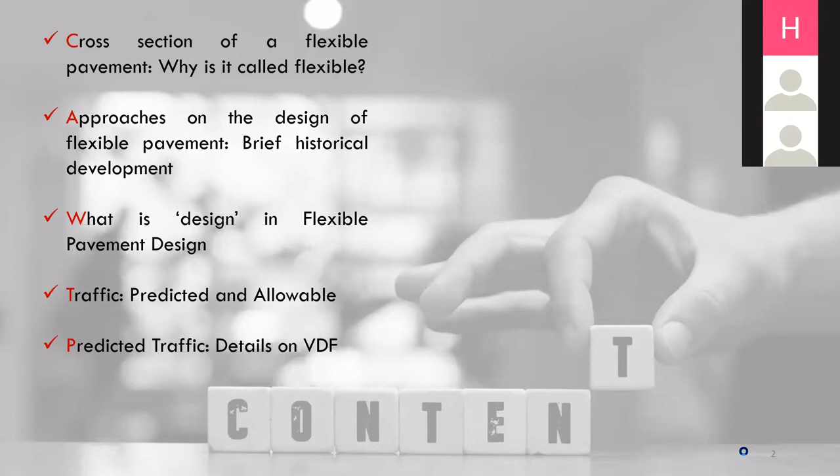Traffic will be introduced in two forms: predicted traffic and allowable traffic. We will discuss in detail about the estimation or calculations of predicted and allowable traffic, and we will try to understand the importance of various parameters associated with them. This part of the presentation is the most important according to me.

Then we will summarize what are the steps involved in the designing of flexible pavement. And finally, we will look into the future challenges ahead and the key takeaways from this discussion today. So, with this menu in the presentation, let us start.

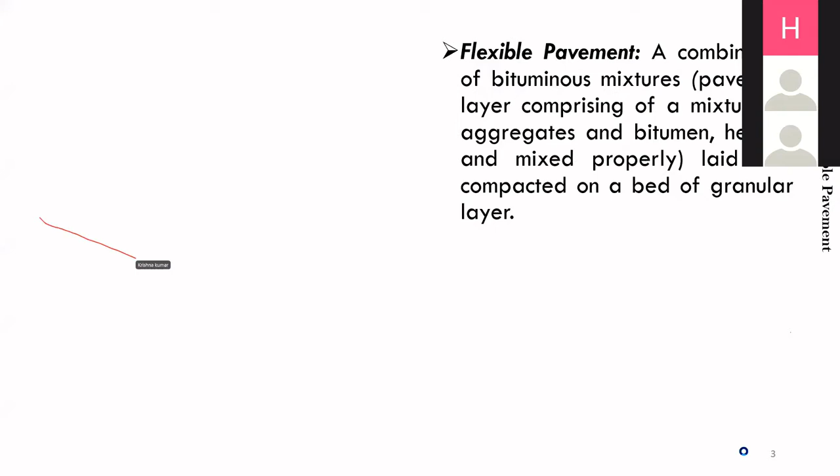Let us first start with the definition of flexible pavement and an understanding of its structure. In a simple way, we can define a flexible pavement as a combination of bituminous mixtures, which is laid and compacted over a granular bed. The bituminous mixture is a combination of aggregates and bitumen, which are heated, mixed, and compacted appropriately.

I chose this definition to put some stress, or priority, on the bituminous layer in the flexible pavement, which is the most important and costliest component in the flexible pavement crust. There is something very interesting here: in a bituminous layer, we have approximately 85 to 90% aggregates and only 10 to 12% bitumen by volume. But 70% of the cost of a bituminous layer comes from bitumen and only 30% from aggregates. This shows how important the small amount of bitumen is in the flexible pavement.

Ankit, there is something projecting on the screen. I don't know, it's happening with me. Ankit, are you able to hear me? Maybe I'll minimize it. Actually, I had force-unmuted all the audience, so it took time. Yes, I think there is some projection issue. I may allow the host, and I would request the host to please take control over it if you can. Okay, so let us proceed then.

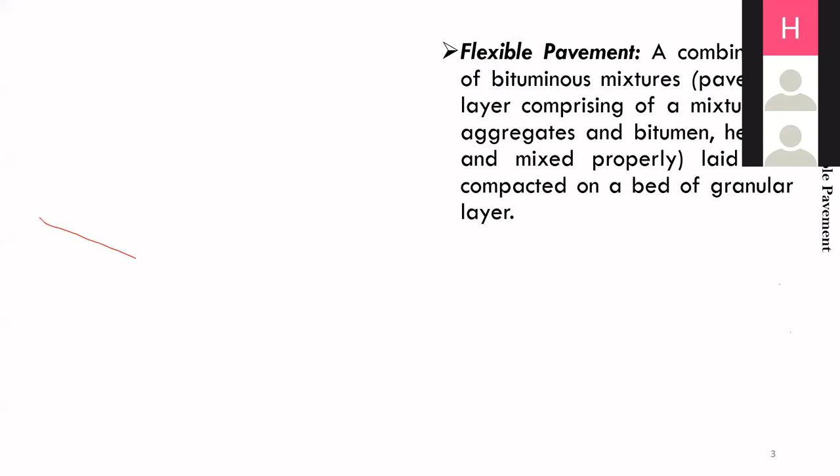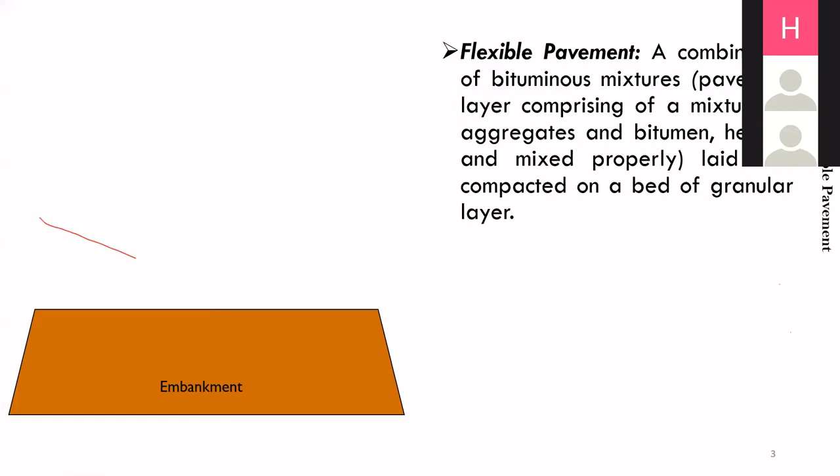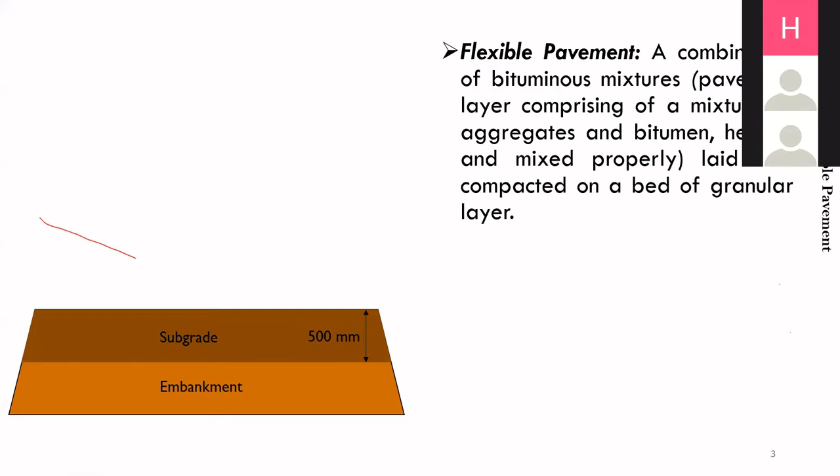Okay, so the bottom part is the embankment, commonly. We can also have a pavement in cutting, but I am just showing embankment here, which is more common in nature. Subgrade can be considered as a part of the embankment or the natural soil in the top 500 mm. Now, the subgrade is also sometimes made up of select borrow soil to meet the density and strength requirement, which is higher than that of the embankment.

Next comes the subbase, and conventionally we use a granular subbase, which is laid and compacted in single or multiple layers. For example, we can have a filter layer and a drainage layer within the same subbase. We can also have a stabilized subbase depending on the requirement. Now, granular subbase, as you can see, is extended to the full width of the embankment.

Above the subbase rests the base layer, and conventionally a granular base is used. We also have options for other base layers such as cement treated bases and emulsion or foamed bitumen treated bases. This is followed by a prime coat, which is a spray application.

Typically a medium curing cutback is used, and it is expected that the prime coat will fill the surface voids in the base layer. After priming, we apply another spray application, called the tack coat. Tack coats are usually emulsions and are applied to ensure proper bonding between two bound layers. The next bound layer which comes over it is bituminous and is denoted as the binder course.

Above this, we apply tack coat again. The next bound layer is also bituminous and is termed the surface or wearing course. This is the top layer of the pavement which you are seeing now. Sometimes an intermediate layer is also put between the binder and the surface course, so the bituminous layer itself can be laid in 2 to 3 different layers.

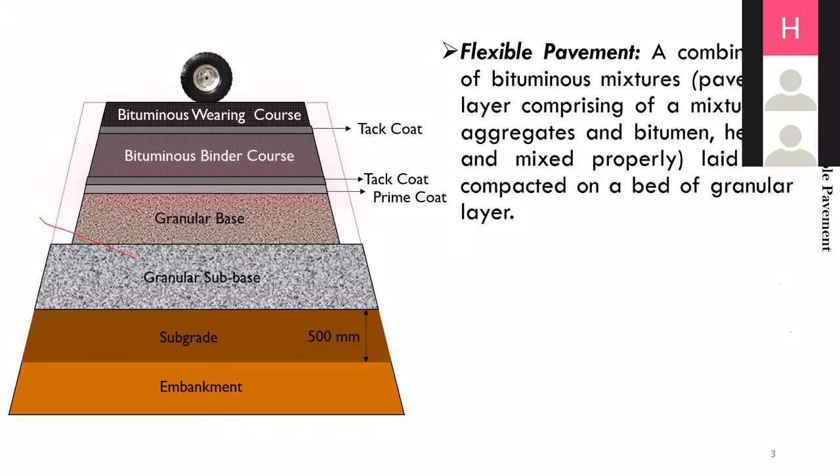The vehicles move on the surface of the layer and cause deformations. The shoulders, which run from the base layer to the surface layer, can be made of earth or can be hard, or paved, in nature. Now, flexible pavements do not have much flexural strength, so the load coming on the surface is transmitted through grain to grain contact. Therefore, the different layers are involved in resisting the deformation within this structure, and any deflection which happens at the bottom, you can see the same deflection at the top. So this is the basic overview of the flexible pavement.

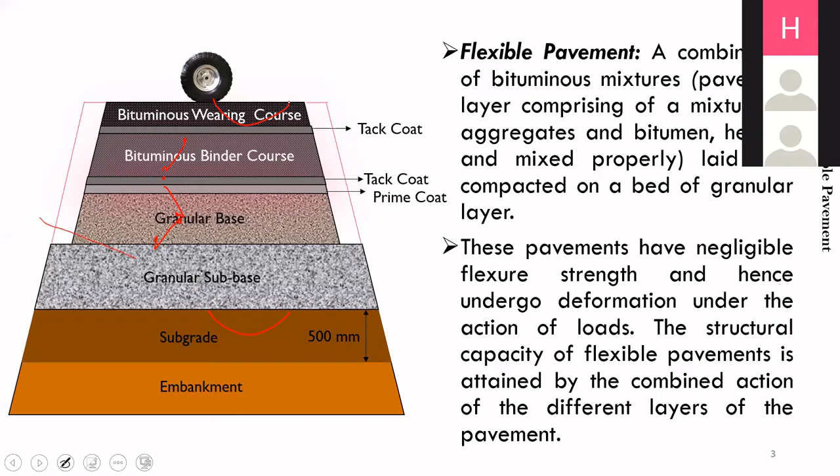Now, before we define what design is in flexible pavement, let us quickly look into how pavement construction and design processes started and got developed.

Prior to the 1920s, the thickness of the pavement was purely based on experience. The same thickness was adopted for all locations, irrespective of varying soil conditions in those locations. As per available records, the first asphalt roadway was constructed in Newark, New Jersey, US, in 1870. Another record mentions the construction of a sheet asphalt in 1876.

Now, this was constructed in Pennsylvania Avenue in Washington, D.C. Sheet asphalt, which I am just marking now, is a mixture of clean angular sand and bitumen. Here we have to note that the bitumen used during this period was natural bitumen, not manufactured bitumen. Manufacturing started only after the 1900s.

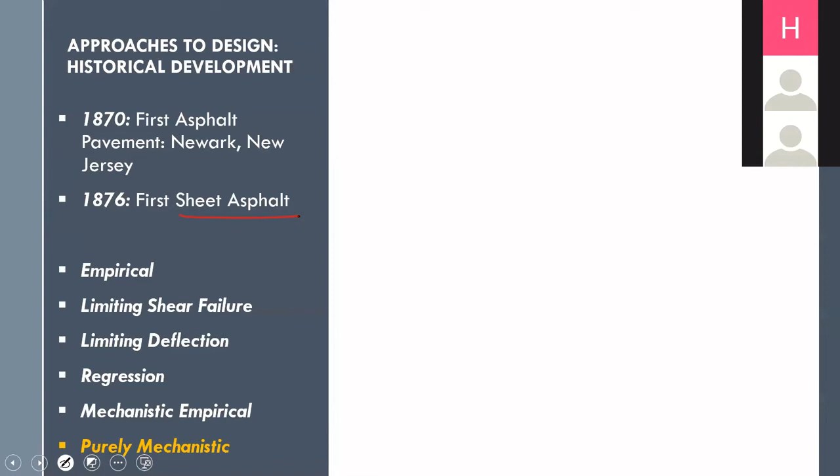Since then, many design methods have evolved. Different design methods for determining the thickness of the pavement can be divided into 6 broad categories: empirical method, limiting shear failure method, limiting deflection method, regression equations based method, mechanistic empirical method, and purely mechanistic method. In the empirical method, there are 2 subcategories: empirical method without any test on soil, and empirical method with a test on soil.

An example of the first subcategory is the design of pavement using the public roads classification system, which came around 1929. In that system, the soil was classified as A1 to A8 under uniform category, and B1 to B3 under non-uniform category. This was later modified through the Highway Research Board classification system in 1945, in which the soil was classified as A1 to A7, and the pavement thicknesses were determined based on the soil type.

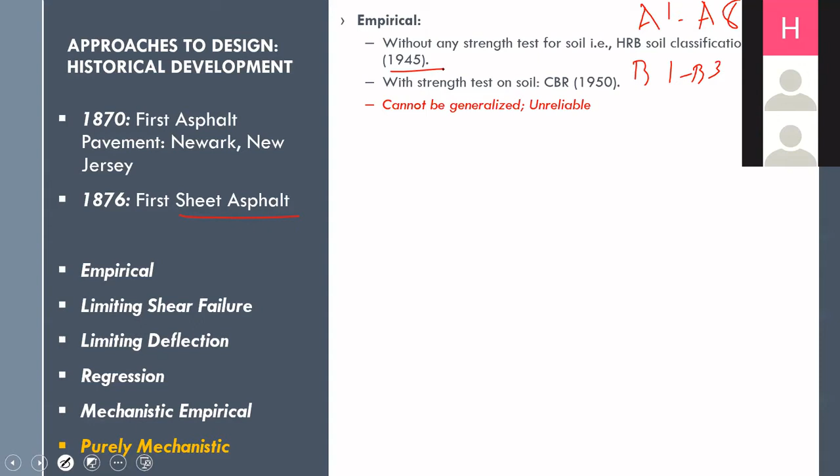The other subcategory under the empirical method is the one that uses the CBR test for soil. Pavement thickness is determined based on the CBR value of the soil. The pavement design in India also used this method initially, and then later we revised our specifications. The empirical method is highly dependent on the conditions, especially the loading condition, the environmental condition, and the material properties for which the method was originally developed. So they cannot be generalized for all locations and they can give unreliable results.

In the limiting shear failure method, developed around the 1950s, the pavement thickness was based on the bearing capacity of the soil, in which the angle of internal friction (phi) and the cohesion of material (C) were used to determine the required thickness or strength. This method, though fundamental in nature, could not last for long, as it was found that the pavement should be designed for riding comfort and not merely for preventing shear failures.

During the same period, around 1945 to 1955, the limiting deflection method was also developed. Pavement thicknesses were determined to control excessive deflection in the surface of the pavement. A few design methods under the same category also considered subgrade deflection instead of surface deflection. But it is found that generally pavement fails by excessive stresses and strains, and not only by deflection. So this is one demerit of this method.

During the 1940s to around 1960s, the Highway Research Board conducted extensive field scale studies to understand the effect of various parameters on pavement design. One of the very famous road tests is the AASHO road test, which laid the foundation for AASHTO pavement design. In these field scale test methods, regression equations were developed based on field data, which were further used for pavement design. One major disadvantage is that the regression equations are location dependent and cannot be reliably applied if these conditions are changed.

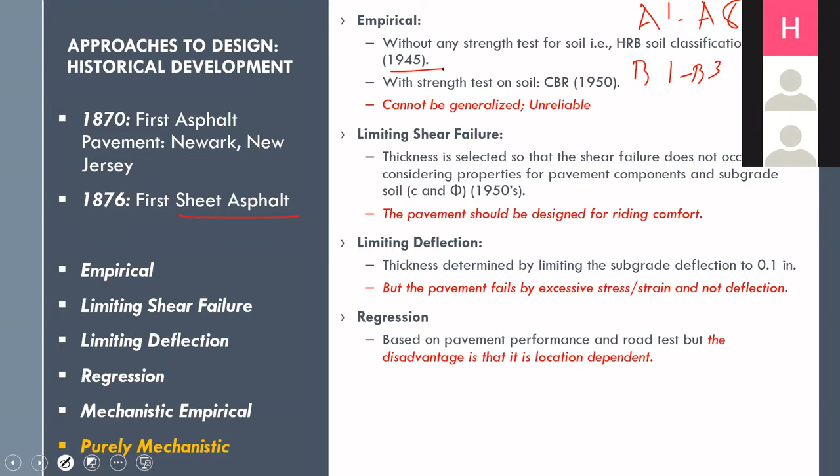The current method, which most countries including India are adopting, is the mechanistic empirical method. In this method, the response of the pavement structure in terms of stresses and strains is obtained using some mechanistic process, for example using linear elastic theory. These response values are used to predict the life of the pavement from field observations. The commonly used responses correlated with pavement performance are the horizontal tensile strain at the bottom of the bituminous layer and the vertical compressive strain at the top of the subgrade. We will discuss them in further slides.

The last method, marked in yellow here, is the purely mechanistic method. This is a future dream to achieve, where we can design the pavement without the necessity of any field observations. But this, however, is very challenging in nature, considering that the materials we use in the pavement are not linearly elastic in nature. They have a lot of variation, and there are a lot of variables which control their performance and so on.

Now let us understand the steps of pavement design. What is pavement design? Pavement design is nothing but finding the suitable layer thicknesses with some specified or assumed material properties, such that the pavement can take the anticipated traffic up to a certain design period before failure. The keywords in this definition are made bold and underlined. Now let us understand them to understand the design process. The anticipated traffic and the design period fall under the same umbrella.

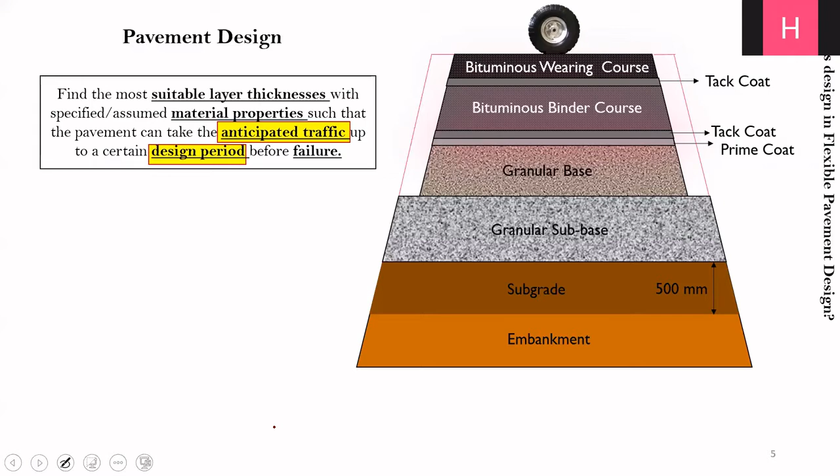Traffic in pavement design means only the commercial vehicles, that is trucks or buses, which are more likely to cause damage to the pavement. So we need to predict the traffic for a given period.

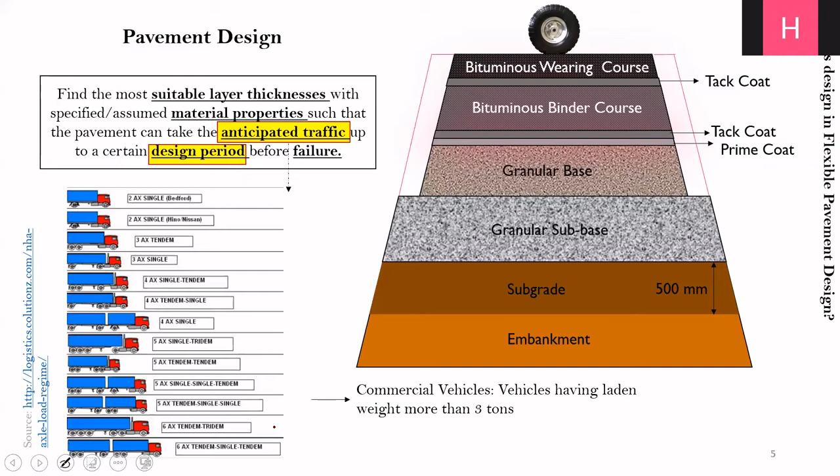The pavement should be designed such that the predicted traffic is less than the allowable traffic. Predicted traffic is determined after doing a traffic survey. We can do manual survey or we can use videography. So what are we doing? We are counting the traffic today and forecasting it for future.

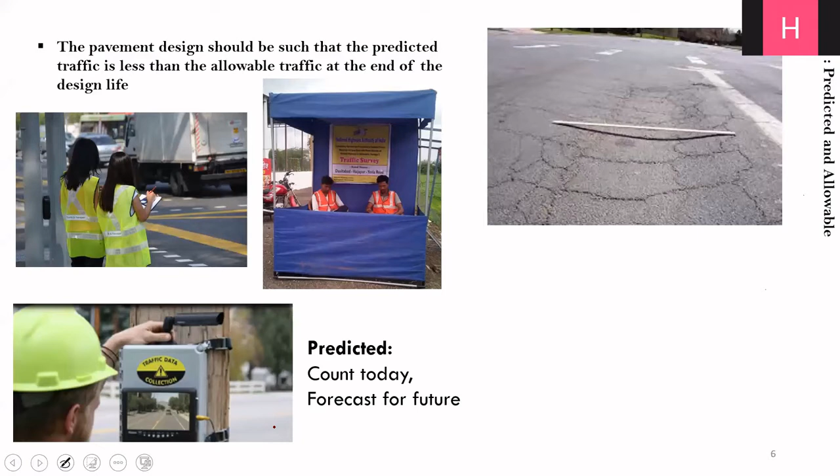What about the allowable traffic? Allowable traffic is the amount of traffic that the pavement can take before failure. And what is failure here? It depends on how we are defining failure. One can define failure as occurrence of say 20% cracks, occurrence of say 20 mm rutting, and so on.

So what are we doing? We are determining that after how many repetitions of trucks my pavement will have 20% cracking, and after how many repetitions of trucks my pavement will have 20 mm rutting, and so on. This allowable traffic is determined from performance models. In short, predicted traffic is determined from traffic survey and allowable traffic is determined from performance models.

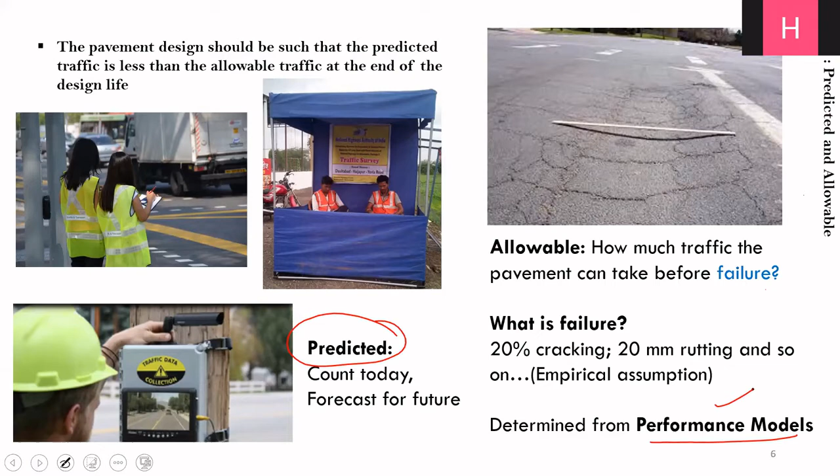So in order to find the total amount of commercial vehicle that will come on the pavement, we have to perform a traffic survey. And we will use this equation for forecasting.

What is this equation? This equation is T equal to 365 into ADT, which is the average daily traffic, into 1 plus R to the power N minus 1 by R, where R stands for the rate of increase in traffic, N is the design period, into VDF, which is the vehicle damage factor, into LDF, which is the lane distribution factor. Now, what is VDF?

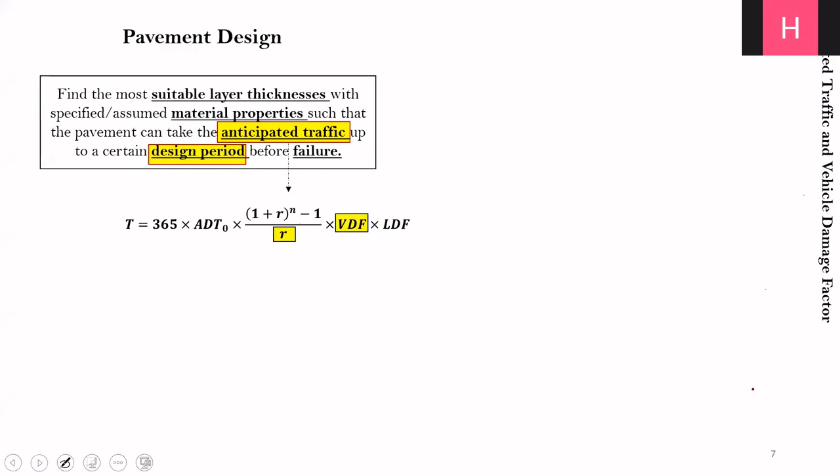As we know, in a pavement different types of trucks, for example single axle, tandem axle, and other multi-axle trucks, will be moving. Now, VDF is used to convert the movement of all these different trucks into some standard truck. We will look at how to do that.

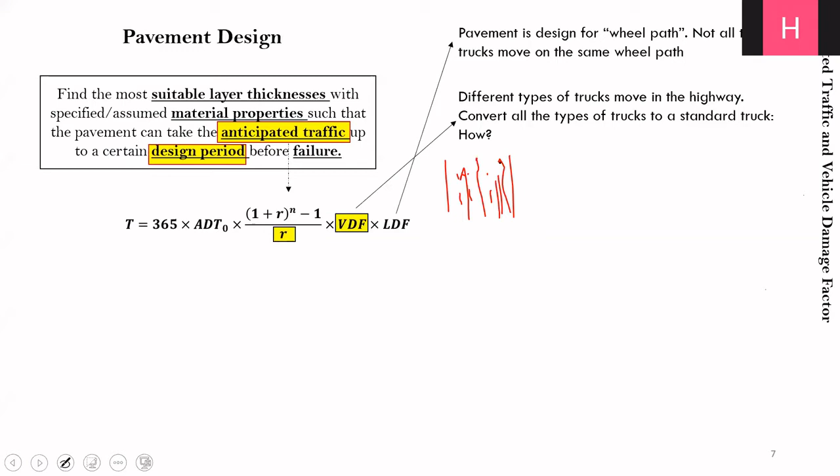Also, in pavement design we consider only the wheel path for analysis. So we can understand that not all vehicles will be traveling on the wheel path. Suppose this is the pavement, and this is the wheel path - some trucks will move here, some there. So there will be a distribution of vehicular movement across the lateral surface of the road. Depending on how wide the road is, the amount of traffic that travels on the wheel path will change, and we will consider only that proportion of traffic for design.

First, the present traffic has to be estimated using a traffic survey, so usually we do a 7-day, 24-hour count. The value of R, the rate of increase, depends on many factors. The growth rate depends on many factors and has to be precisely estimated using past trends, demand elasticity, and other factors.

One can refer to IRC 108 for more details. Also, the growth rate has to be established for each category of vehicle. For example, the growth rate of a single axle truck can be different from the growth rate of a tandem axle truck, and so on. So for each category of vehicle, we should find what is the growth rate.

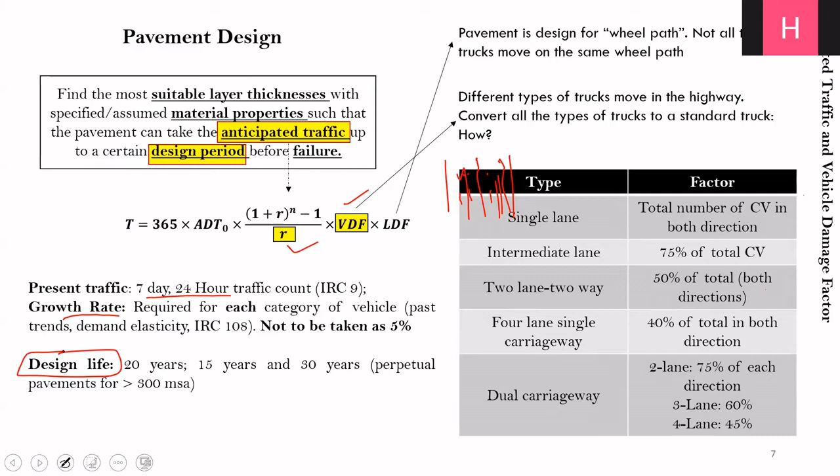The design life, that is the value of N, depends on the type of facility we are designing. For national highways and state highways, it is usually 20 years. For other roads, it can be 15 years. If the pavement is anticipated to receive very high traffic, we can design a perpetual pavement also, which we will discuss in the second half, having a lifespan of more than 30 years.

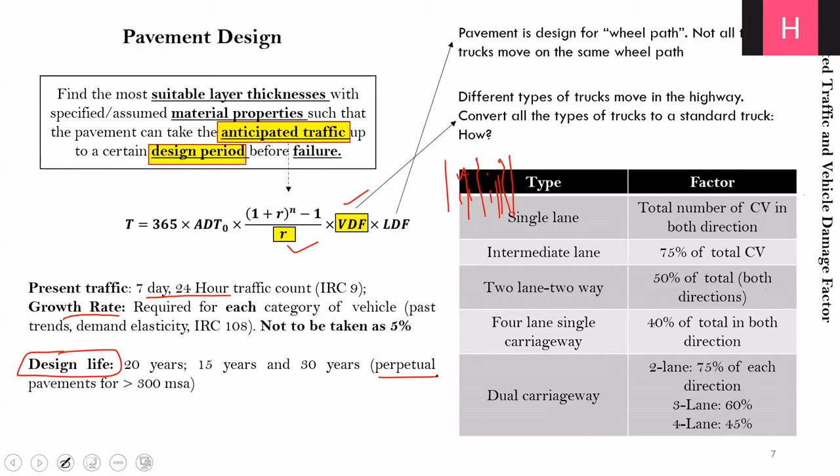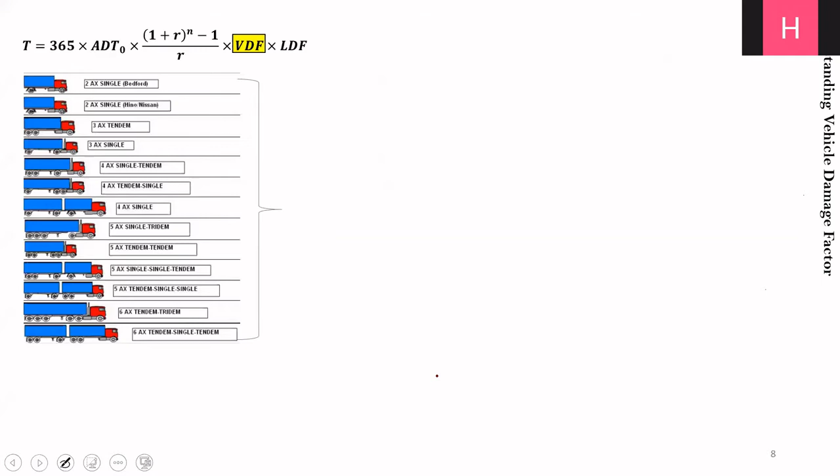Now let us talk about VDF. As I said, we will have different types of trucks with varying axle configurations moving on the pavement. Now, I want to convert the number of repetitions of different trucks to the number of repetitions of a standard vehicle, which in our case is a single axle truck with dual wheel set at the rear. The standard axle load is taken as 80 kilonewton with a tire pressure of 0.56 megapascals.

Now, what is important for us is to understand the fundamentals of VDF. Let us start by defining it first. So, what is VDF?

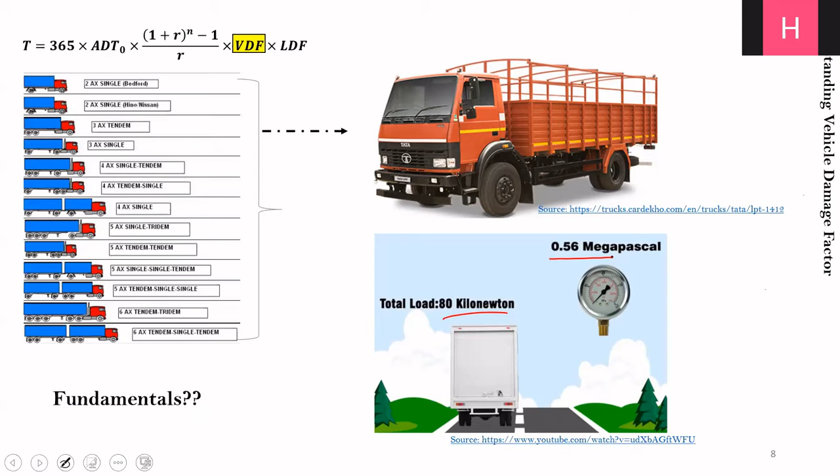VDF is the damage per pass to a pavement by the axle in question relative to the damage per pass of a standard axle load, which is usually 80 kilonewton single axle load.

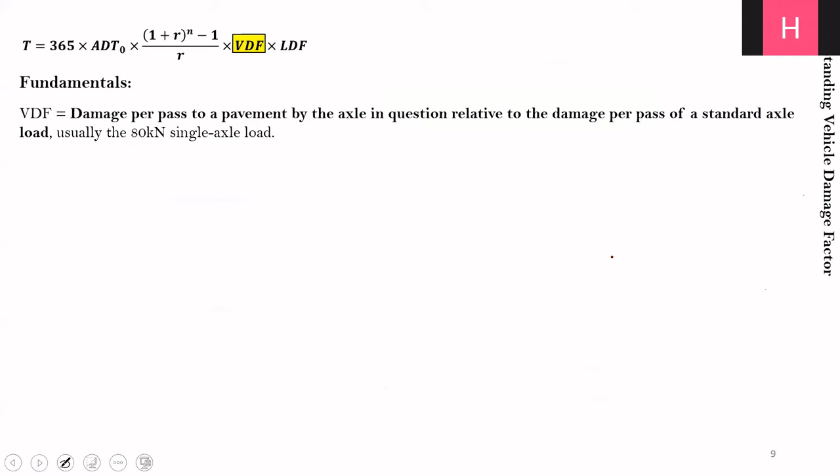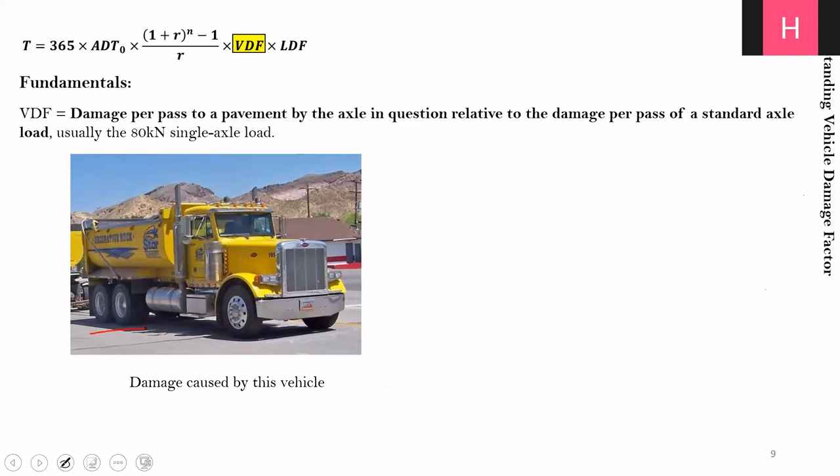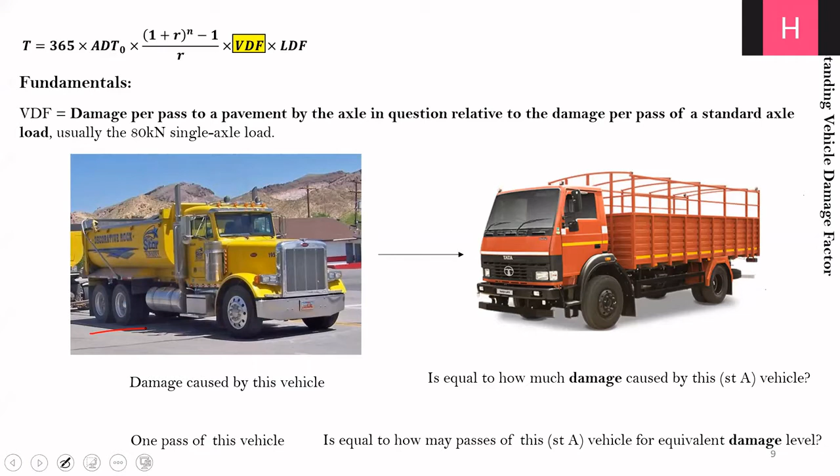What does this mean? It means the damage caused by this truck, which is a tandem axle, is equal to how much damage caused by the standard axle truck. In other words, one pass of this vehicle is equal to how many passes of the standard axle truck at the same level of damage. And how is damage defined?

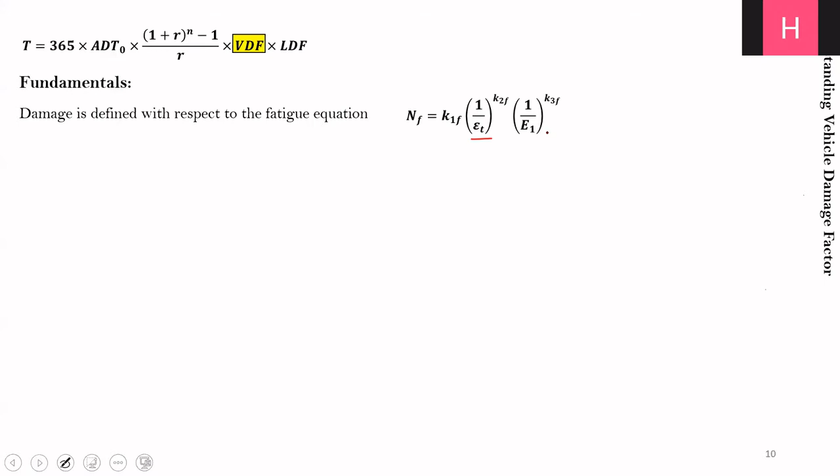Traditionally, the fatigue model is used for defining damage. This was considered in the AASHO test, from where the concept of VDF has been actually taken. What is NF? NF is the cumulative number of loading cycles in terms of ESAL to failure, and this is a function of epsilon T and E. What is epsilon T? Epsilon T is the horizontal tensile strain at the bottom of bituminous layer, and E is the resilient modulus of the bituminous layer.

Here, K1F, K2F, and K3F are regression model parameters. Later in this presentation, we will also discuss the development of this model.

Different researchers, or research organizations, based on large amounts of data, have found that the value of K2F is approximately equal to 4. What does this mean? From this equation, the fatigue life NF is inversely proportional to the 4th power of the horizontal tensile strain at the bottom of bituminous layer. That we can clearly see.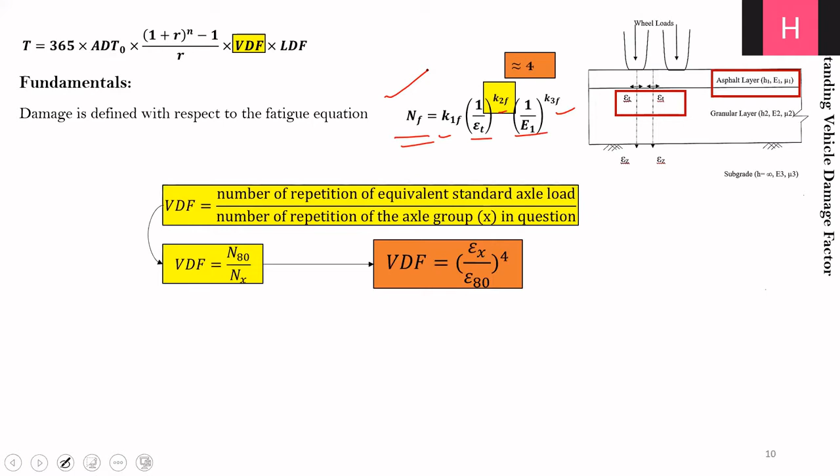Now from the model shown above, N80 is proportional to 1 by epsilon 80 to the power 4, and NX is proportional to 1 by epsilon X to the power 4. Therefore, VDF can be written as epsilon X divided by epsilon 80 to the power 4. This is the fundamental definition of VDF we should remember.

Now, if X and 80 are of the same axle configuration, that is, X is also a single axle load, say with a load of P1 — you can see this is a single axle truck with dual tires, let us say the load of this truck is P1, and this is our standard axle truck with dual wheels with a load of 80 kilonewton. If both are of the same axle configuration, we can equate strain with load.

Why? Since we know that E is equal to stress by strain, from here we can say that strain is equal to P divided by A into E. So you can see strain is proportional to P. But this will happen only when both are the same axle configuration — this is also single axle and this is also single axle. Therefore...

VDF in this case can be written as how much? P1 divided by 80, to the power 4. So this equation I just converted to this equation.

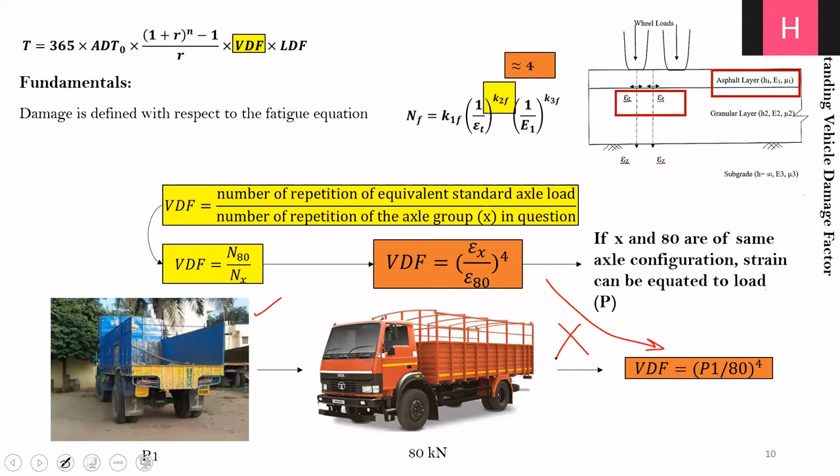On the other hand, if X, let us say this vehicle is not a single axle, but of some other axle configuration — let us say this is a tandem axle or tridem axle — we cannot equate strain with load directly. In such cases, we have to do one extra analysis. So let us look at that.

Say we want to convert this tandem axle load with a load of T1 to our 80 kilonewton standard axle load. So what I will do: first I will find out the tandem axle load for which epsilon because of the tandem axle load divided by epsilon because of our 80 kilonewton standard axle load, to the power 4, is equal to 1. This is what I will find out through some linear elastic analysis. Researchers have already done this analysis — you can also do it if you have some background on pavement analysis — and we can find out very easily that this load is equal to 148 kilonewton.

What does this mean? This means that the strain at the bottom of bituminous layer with an 80 kilonewton single axle load is the same as the strain at the bottom of the bituminous layer with a 148 kilonewton tandem axle load.

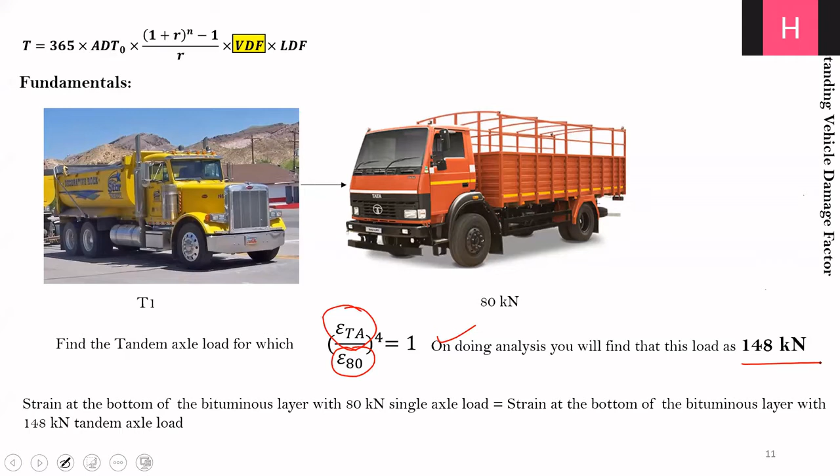Now we can calculate the VDF of any other tandem axle load. Let us do it for T1, because this is the example which we have taken.

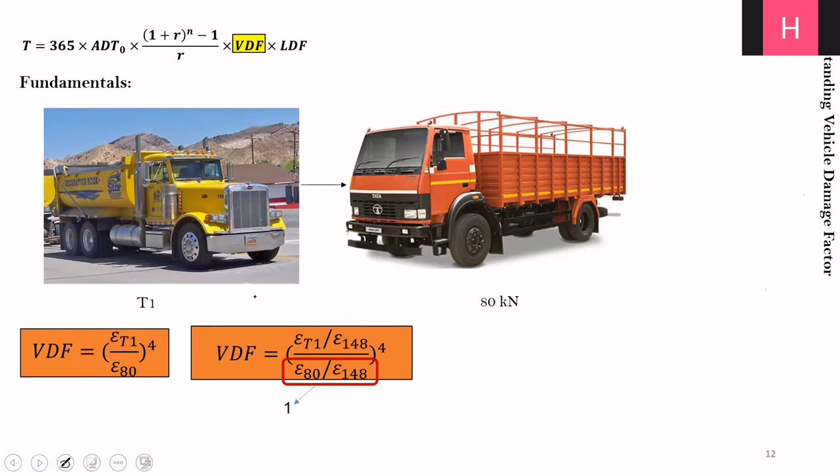As per our definition, VDF equals epsilon T1 divided by epsilon 80 to the power 4. If we divide the numerator and denominator by epsilon 148, we get epsilon T1 divided by epsilon 148, divided by epsilon 80 divided by epsilon 148, all to the power 4. Now the denominator, as discussed in the previous slide, equals 1, because this analysis has already been done. Therefore, VDF equals epsilon T1 divided by epsilon 148 to the power 4.

Since T1 and 148 are of the same axle configuration, both being tandem axles, we can equate strain with load directly. So VDF equals T1 divided by 148 to the power 4. Similarly, we can carry out such analysis for tridem axle or any other axle in question, by doing some limited pavement analysis.

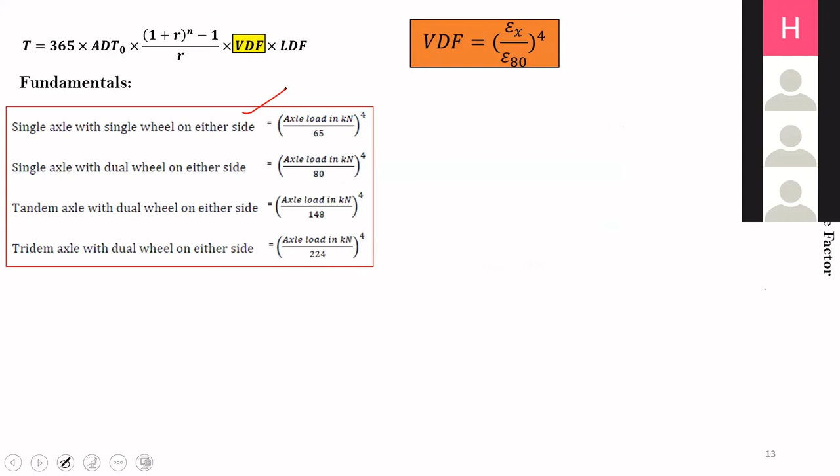This is a single axle dual wheel with 120 kilonewton load. This is a single axle dual wheel with 90 kilonewton load. This is a tandem axle with 200 kilonewton load, and this is a tridem axle with 280 kilonewton load.

The second column is the observed number of repetitions based on the traffic survey. For example, let us say you observed 100 repetitions of this vehicle, 150 repetitions of this type of vehicle, and so on.

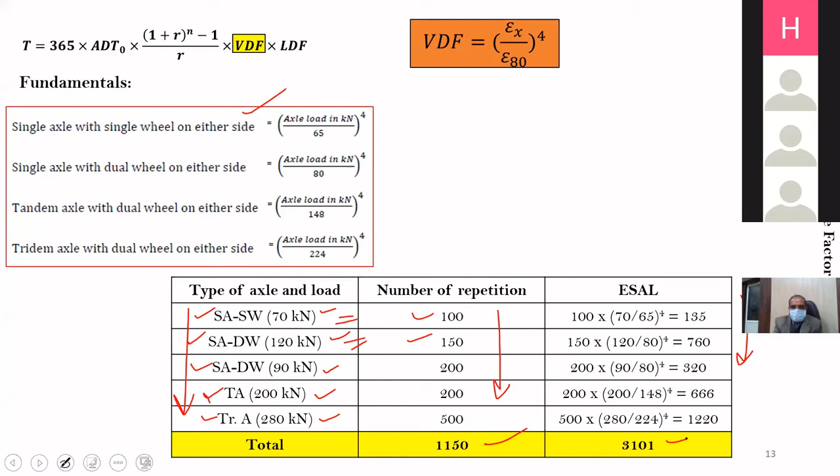The third column shows the calculation procedure of converting the individual repetitions into repetitions corresponding to standard axle. You can see that 1150 repetitions of different commercial vehicles in this case is equal to 3101 repetitions of equivalent standard axle load. So based on the traffic survey and the vehicle load spectrum, you can find out the total equivalent standard axle load.

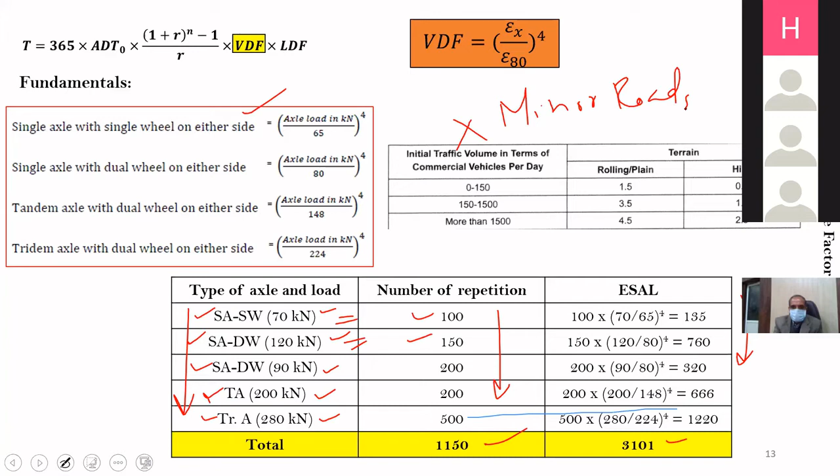So we are done with our discussion on understanding the calculation of predicted traffic. I hope this part was useful to you. Let us now proceed to the next step, understanding the allowable traffic.

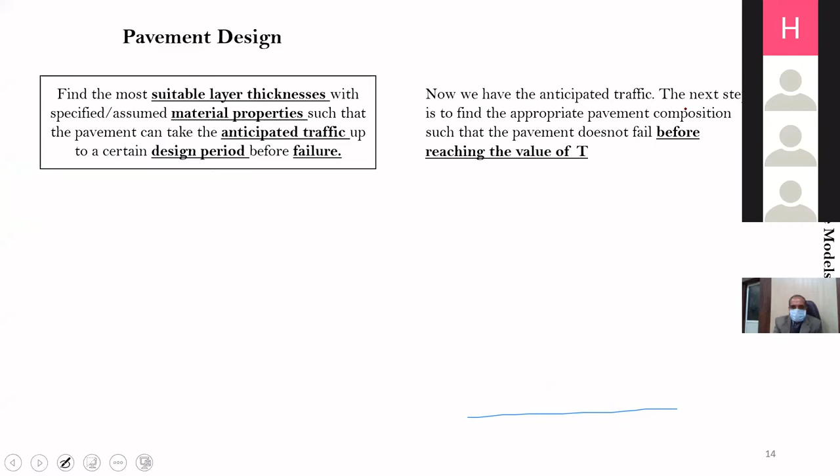Once we know the anticipated or predicted traffic, the next step is to find out the appropriate pavement composition such that the pavement does not fail before reaching the value of T. And what is failure here? As per IRC 37, failure is defined in terms of fatigue cracking and rutting.

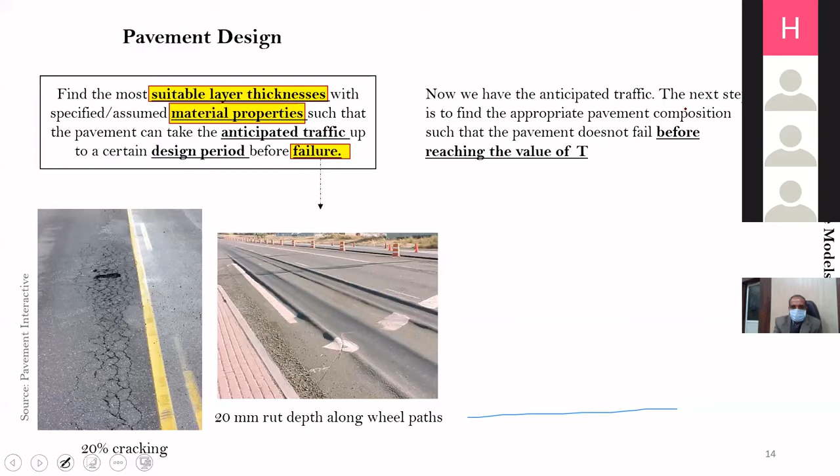We say that the pavement has failed in fatigue if the surface shows more than 20% cracks. And we say that the pavement has failed in rutting if the average rut depth on the wheel path of the pavement is greater than or equal to 20 mm.

So in addition to the anticipated traffic, we are also interested to find out after how many repetitions of equivalent standard axle load the pavement will have 20% cracking and/or 20 mm rutting. How do we do that? We do that with the help of performance models. Since we have two failure modes, we have two performance models: the fatigue model and the rutting model. If you define three failure modes, you should have three performance models, and so on.

So let us start with the fatigue model first.

So there are two fatigue models recommended by IRC, model 1 and model 2. These models were developed from the R6 and R56 research schemes by taking observations from different pavement sections constructed in different parts of the country. You can see from the equation that the form of both equations is the same, the only difference being different coefficients, specifically K1.

Why are these coefficients different? Because this is based on the reliability level chosen for design. If the traffic for which the pavement is being designed is less than 20 MSA, then the 80% reliability equation is chosen, while for higher levels of traffic, the 90% reliability equation is chosen. Now, a very important note: this reliability is not the reliability in pavement design, it is the reliability level of the models.

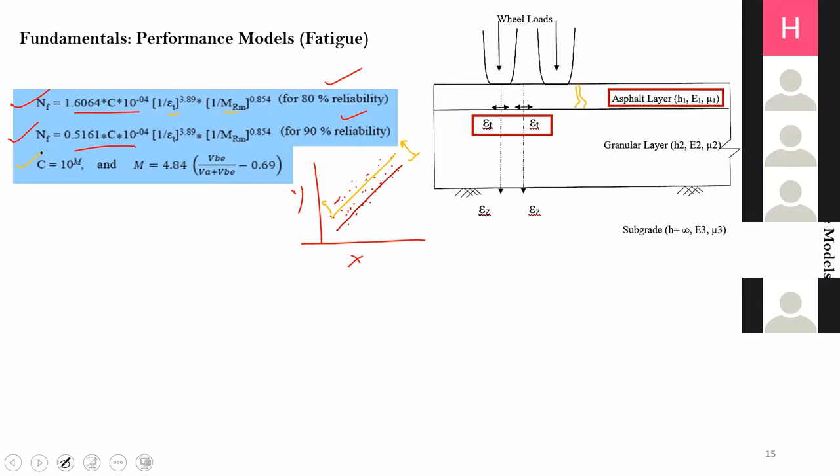However, the crack may also start from the top and propagate to the bottom. There can be a case where the crack starts from here and propagates to the bottom - this is called top-down cracking. Research has indicated that top-down cracking is a result of aging of the asphalt mixture and horizontal stresses at the edges of truck tires.

It is expected that if appropriate binder is chosen and the mix design of the bituminous layer is done properly, top-down cracking can be controlled or eliminated. But currently, we do not have any performance model for top-down cracking. IRC only recommends the use of appropriate binder to control top-down cracking, so our discussion of the fatigue model is directed towards the bottom-up cracking phenomenon only.

Now, if you see the fatigue model again, there is a parameter C which is introduced. C is a function of mix volumetrics. How? C is equal to 10 to the power m, where m is equal to 4.84 into VBE divided by VA plus VBE, minus 0.69, where VBE is the volume of effective bitumen in the bituminous mixture, and VA is the volume of air voids in the bituminous mixture.

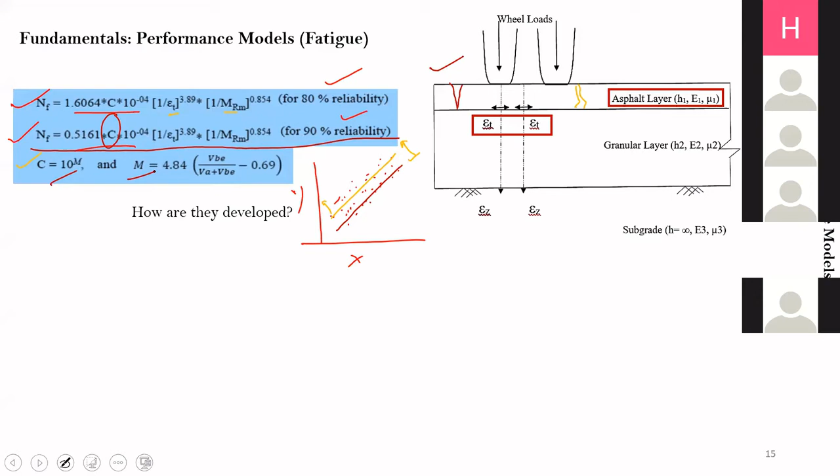Now the question is, how are these models developed? If tomorrow you want to develop one, how will you go about it? During the R6 and R56 scheme, different pavement sections were constructed in different parts of the country with varying cross-sections and known material properties. We want to understand how these models are developed, because in future, if someone wants to validate these models or propose a new model, one should first know about the process involved. Let us discuss that.

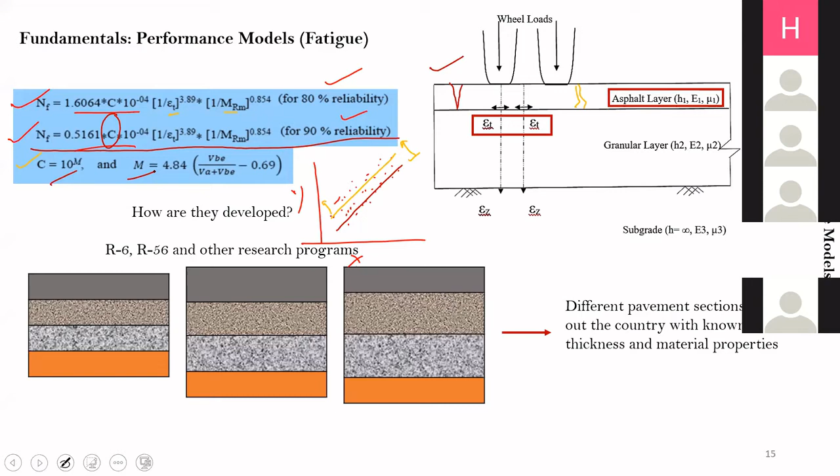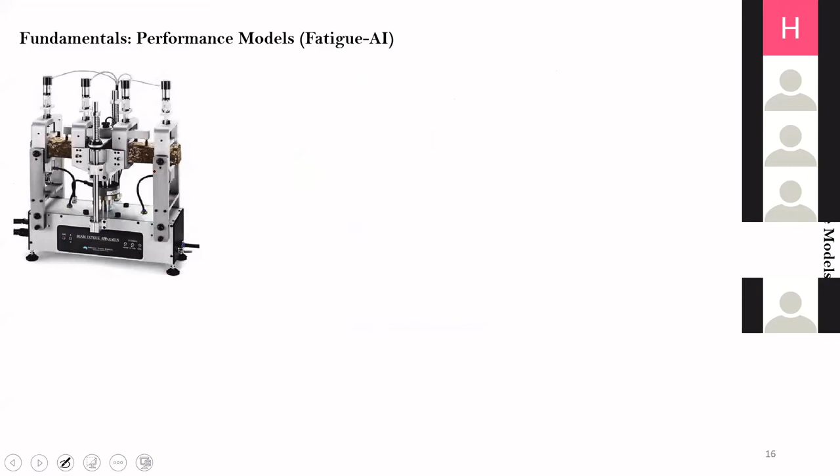So what are the steps? For different bituminous mixtures used in pavement construction, we perform a repeated load four-point beam bending test on those mixes. Usually a stress control test is used. We make multiple samples, say 9 samples. The first 3 samples are subjected to a stress level of sigma 1, the next 3 to sigma 2, and the last 3 samples to sigma 3.

At each stress level, we note down the strain in the sample after the 200th repetition. After 200 repetitions, we expect nothing significant has happened to the material, so this is the undamaged state, and we note the tensile strain generated at the bottom of the layer using the deflection values after the 200th cycle. We also calculate the modulus, or value of E, at the 200th repetition.

At each stress level, there will be certain loading cycles to failure. How is this defined? When you perform the test, you find the modulus decreasing with increasing loading cycles. This is the failure point, NF, and this is the modulus. The initial modulus decreases with increasing number of loading cycles. When the modulus becomes 50% of the initial value, E naught, we note down that number of cycles. This is the number of cycles to failure for that sample at that stress level, denoted as NF.

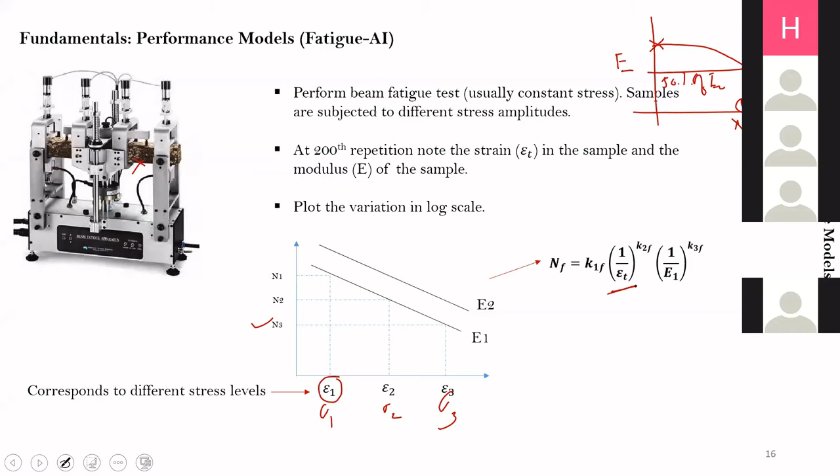Now we plot the variation of NF with the initial strain level, the strain recorded at the 200th repetition, for stress sigma 1, sigma 2, and sigma 3. For each sigma, we also know the number of cycles to failure, so we plot this graph. This relationship for different values of modulus can be modeled using a simple regression equation: NF equals K1 times (1 by epsilon T) to the power K2, times (1 by E1) to the power K3. Here, epsilon T is the initial strain at the 200th repetition, and E1 is the initial modulus at the 200th repetition — the values of strain and modulus in the undamaged state of the material.

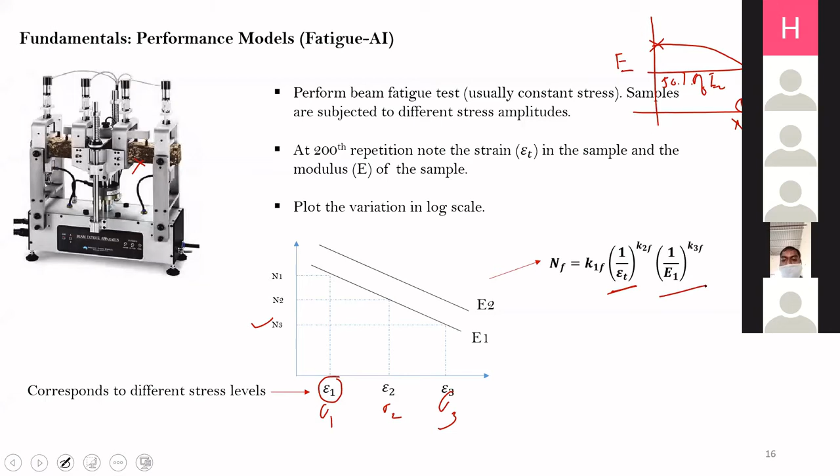But this model was developed in the lab, so we will have to shift it for field observations. How do we do that? As mentioned, different pavement sections were constructed with varying material properties and thicknesses. Since the material properties and thicknesses are known, we can find the stresses and strains at different locations in the pavement using a layered analysis, usually done using IIT PAVE in India. We will have a demonstration in the second half.

We place a 40 kilonewton load, because our standard axle is 80 kilonewton, so half of that with a dual tire, 40 kilonewton with a 0.56 MPa load. We place this on top of the pavement in our computer model. Next, using the layered theory, we estimate the values of horizontal tensile strain at the bottom of the bituminous layer at different positions to find the critical value. The tensile strain will differ across sections because they have different thicknesses and different material properties.

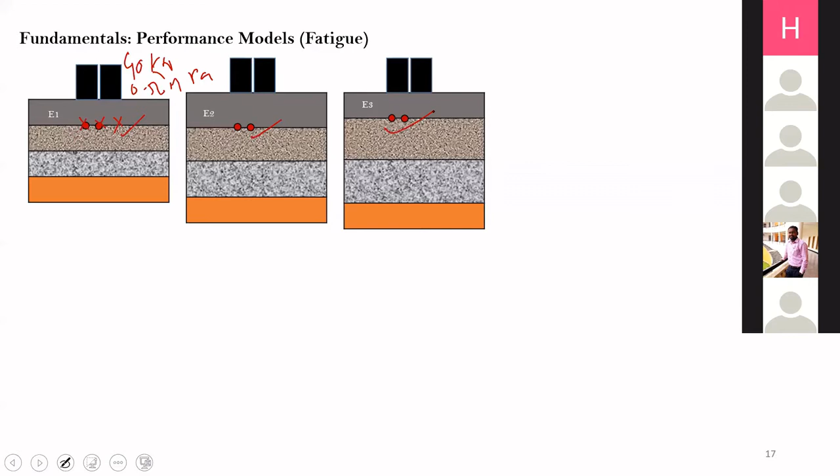Now we observe this pavement. We go to the site and keep observing it for many years. From the traffic data, we find out after how many repetitions of equivalent standard axle load 20% cracking has appeared. In different pavement sections, we will have different values.

For example, let us say in pavement section 1, after NF1 number of loading repetitions, there was 20% crack. Similarly, in section 2, after NF2, 20% crack appeared, and in section 3, after NF3, 20% crack appeared. Now, NF1, NF2, and NF3 are actually the number of loading cycles to failure for field pavement sections.

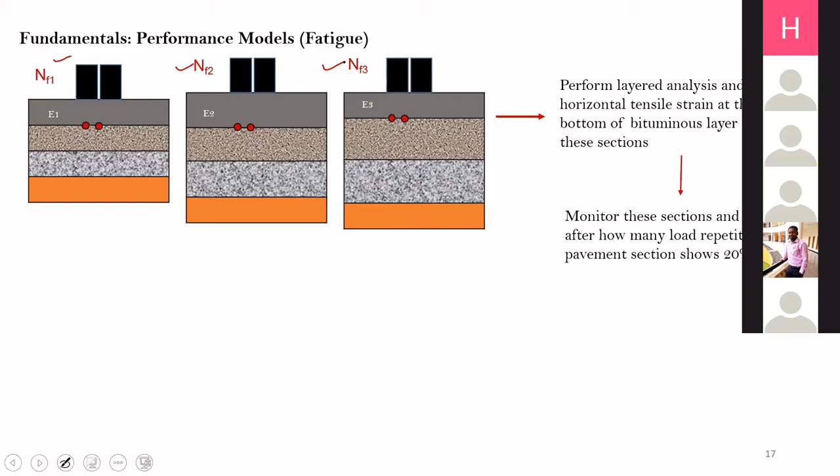Now we will calibrate the lab model with the field data. This is the basic equation of fatigue. The values of K2F and K3F, which depend on material sensitivity, are taken from laboratory analysis, as discussed in the previous slide.

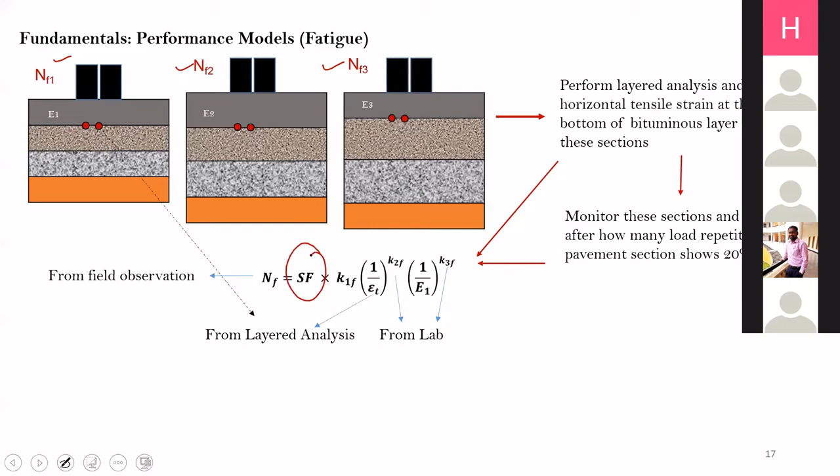Epsilon T here is the horizontal tensile strain, which we found from IIT PAVE. We know the value of E1 as the material property is known, and the value of NF from field observation. So we can calculate the shift factor and K1F by superimposing this model with the model developed in the lab, and finally we get the equation which looks like this. These are the basic steps used to develop the performance model.

Though we have discussed the outline of the process, the actual process is very cumbersome and not very straightforward. If you are interested to know more, you can read papers by Professor B.B. Pandey, Professor K.S. Reddy, and Professor Animesh Das, mostly produced by IIT Kharagpur, because these models were developed there.

This is a process of using actual data from laboratory and field. This is just an overview which we are discussing. In a similar way, we can develop the rutting model also.

In the rutting model, we use the vertical compressive strain on top of subgrade, denoted as epsilon Z. Why do we take this as a representation for rutting? Because in a layered system, there is an assumption that plastic deformations are proportional to elastic deformations, so whatever happens at the bottom, we can see at the top. It is widely believed that rutting results from excessive vertical compressive strain on top of the subgrade.

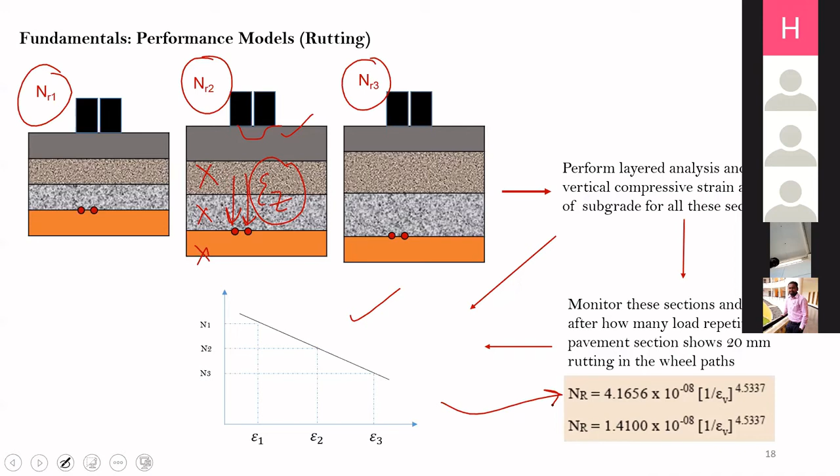Having said this, now let us see what are the steps involved in pavement design once we know this background. What I will do is put T equal to NF and NR in the performance model. So NF I am getting from the performance model, and suppose this T is the anticipated traffic from traffic survey. So we have two equations, right?

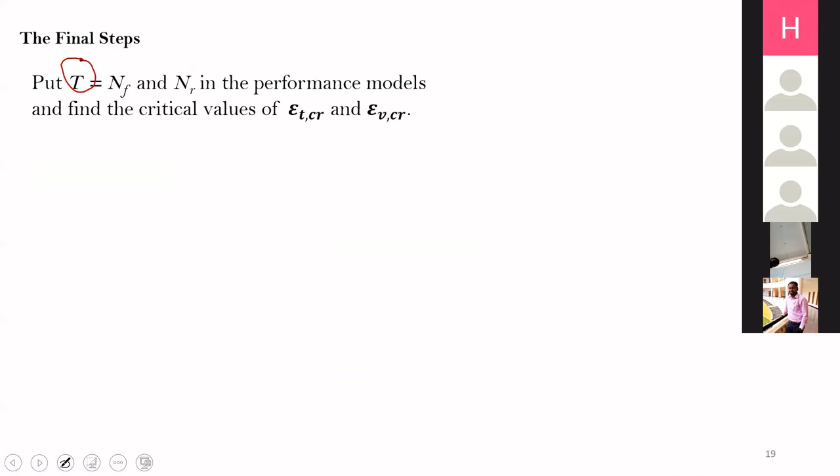NF is equal to K1 into 1 by epsilon T to the power K2, into 1 by E to the power K3. So you just put this T in place of NF and find out what is the critical or allowable tensile strain at the bottom of the bituminous layer.

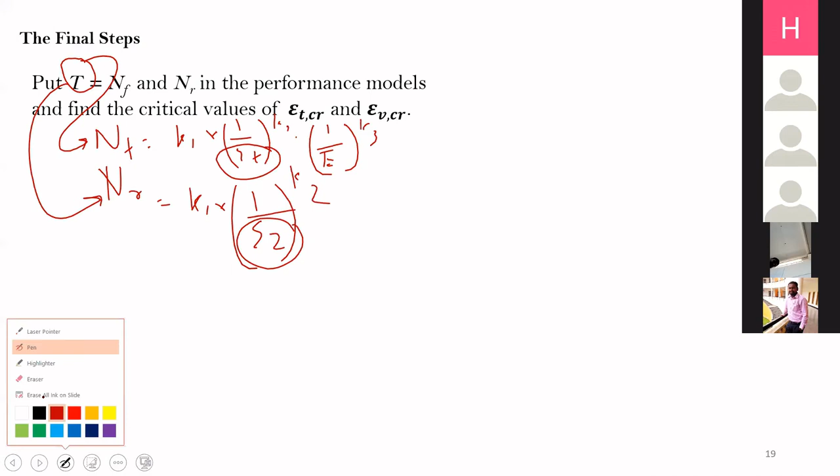Similarly, we have another model, NR is equal to K1 into 1 by epsilon Z to the power K2. This is for rutting. So I will put T in place of NR and find out what is the critical value of epsilon Z. So these are the allowable values for a given value of T.

Then for a given set of material properties, now I have the value of critical tensile strain and critical vertical compressive strain. What we will do is assume a pavement section in which the material properties are known, and we will start with some assumed thicknesses of different layers.

After performing the layered analysis, we will find out what is the value of epsilon T and epsilon Z. This actual epsilon T and epsilon Z, which comes because of this pavement section, should be less than the critical values. If it is not, we will change the layer thickness and keep doing that till we get an appropriate combination of thicknesses such that epsilon T and epsilon Z are less than epsilon T critical and epsilon Z critical. So that is all about the steps involved in pavement design.

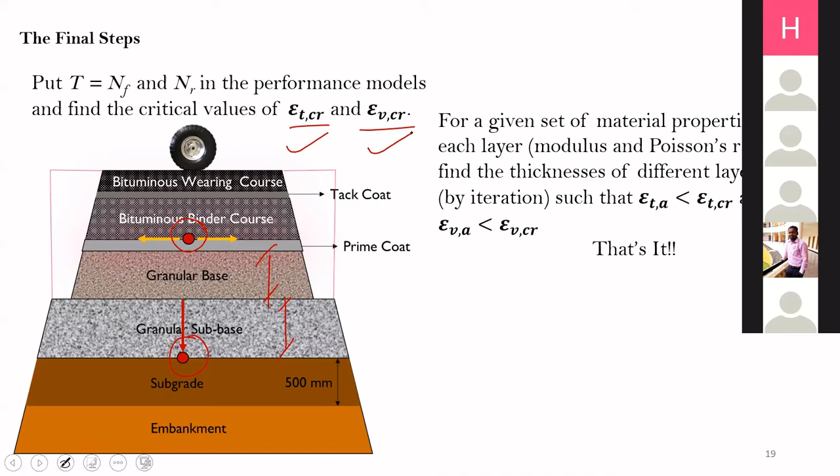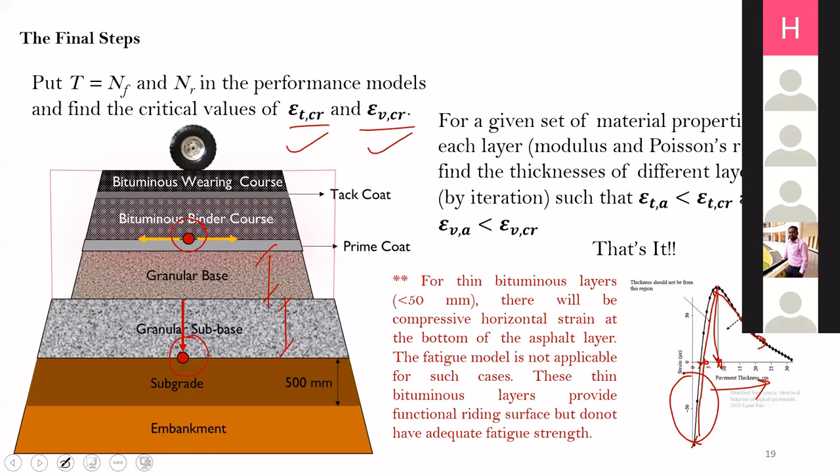Sometimes we observe that for thin bituminous layers, typically less than 30mm, 40mm or 50mm, first with increase in thickness the strain will be compressive in nature. As you keep increasing the thickness, the strain will increase, come to zero, rise to a maxima, and only after a particular thickness will the strain decrease with increase in thickness. So if the strains are coming as compressive, this means the pavement is very thin to take up any structural load, so it is not contributing towards fatigue resistance. Rather, that layer is just serving the functional requirement for riding comfort. This is also something we have to remember while doing the pavement analysis.

Now, when we discussed about predicted traffic, we talked about VDF, which is used to convert the different axle types to an 80 kilonewton standard axle load. Now that is one way. Is it possible to define failure considering different axle types separately and not converting them through VDF?

Yes, it is possible. One common method is the one we use in concrete pavement design, using Miner's law of failure. This is also known as the cumulative fatigue damage approach. So what is cumulative fatigue damage approach?

This was initially coined by M.A. Miner in 1945. So what is cumulative fatigue damage? This is the summation of

ni by Ni, where ni is the expected number of load repetitions for a given axle load category. For example, we know from traffic survey how many repetitions will be there for single axle, tandem axle, or tridem axle; that is the value of ni. And Ni is the allowable number of load repetitions before failure corresponding to a particular load under that axle category. So here also we have something called expected traffic and allowable traffic.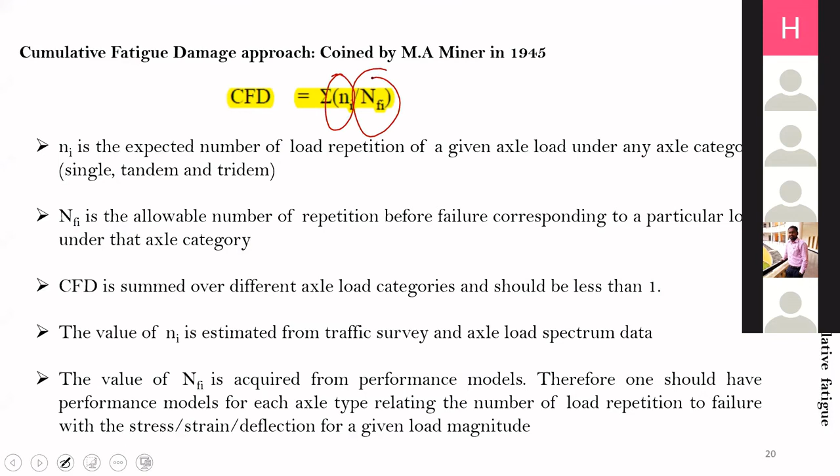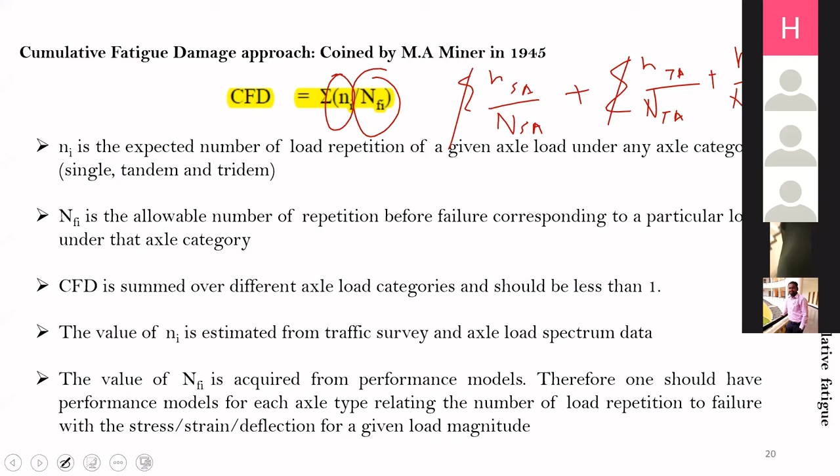In this formula, small ni is obtained from traffic survey, while capital Ni is obtained from the performance model. So suppose we are considering 3 axle types, single axle, tandem axle, and tridem axle, then we have 3 summation terms with 3 ni's and 3 Ni's: ni of single axle by Ni of single axle, plus ni of tandem axle by Ni of tandem axle, plus ni of tridem axle by Ni of tridem axle. So this summation should be less than 1.

This means since we need 3 allowable traffic values here, we should have at least 3 performance models, which we currently do not have. So we are using the VDF based procedure instead.

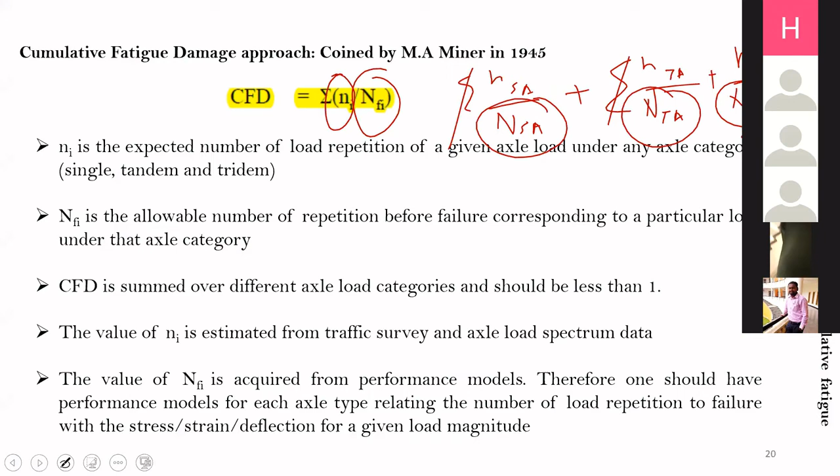Now, one application of this approach is also used in flexible pavement when we are dealing with cement treated bases, when we have something called an unconventional base, which is a cement treated base. Let us see how this cumulative fatigue damage is applied in flexible pavement when we have a cement treated base.

While doing the analysis, in addition to the horizontal tensile strain at the bottom of the bituminous layer and the vertical compressive strain at the top of the subgrade, we also need to find out the horizontal tensile stress and horizontal tensile strain at the bottom of the CTB. So we have to find out the value of sigma and the value of epsilon also. For finding out the stresses and strains in CTB, IIT PAVE analysis is done, but with a tire pressure of 0.8 MPa instead of 0.56.

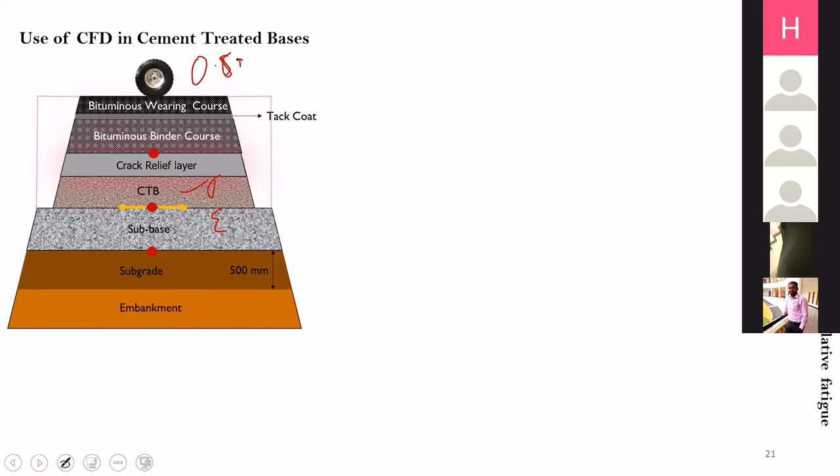While doing this analysis, we will place a 40 kilonewton load, but with a 0.8 MPa tire pressure. This is the difference in the analysis. Why? Because these two models are generally used in the application of cumulative fatigue damage. The first model is taken from Australian guidelines, and the second from MEPDG. These models are calibrated at 0.8 MPa tire pressure, and because they are calibrated models, we have to stick to the procedure on which they are actually applicable.

So what we will do here in case of cement treated bases: first we will find out the horizontal tensile strain at the bottom of the CTB. This value of epsilon T, we will put in the first equation, and using this, we will calculate the value of N. Now this N, which we get, and the value of T, which is the predicted traffic - this is the first check which we will do.

Next, we will perform the cumulative fatigue damage analysis. Let us see how we do that. For that, we will need the axle load spectrum data - a single axle spectrum load data, a tandem axle spectrum load data, and a tridem axle load spectrum data. One passage of tandem axle is considered as 2 passages of single axle with half the load on each axle. One pass of tridem axle is considered as 3 passes of single axle with 1/3 the load on each axle.

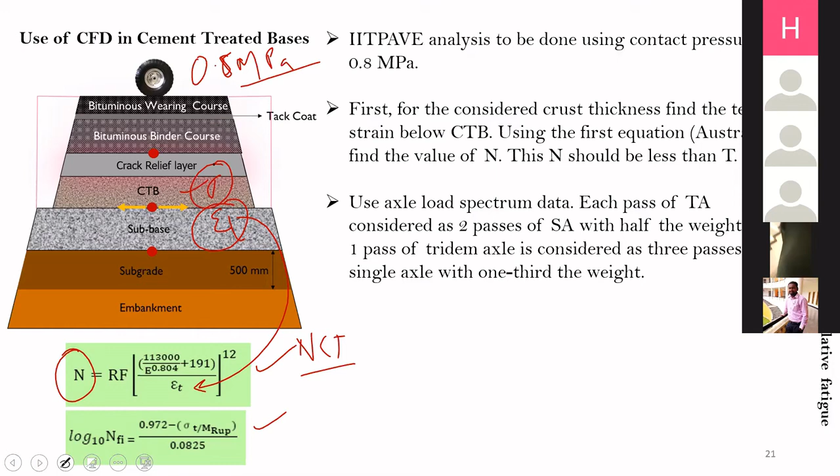So what we will do: we need to find the tensile stress at the bottom of CTB, that is the value of sigma, at CTB for different axle loads using the IIT PAVE software. Please note here, this is not the 40 kilonewton load which you will keep here while doing the analysis. We will find out the stresses for each load under different axle category. We will discuss about this in the next slide.

Since we know the modulus of rupture of this CTB - this is MRUP, the modulus of rupture of the CTB, which we know because we know the material property - we will use the second equation to find out NFI. This NFI is the allowable number of load repetitions, and sigma T we are already finding out from IIT PAVE. Then for each load category we will calculate the ratio of expected to allowable number of load repetitions, which quantifies the failure, and the summation of CFD for different axle load groups should be less than 1.

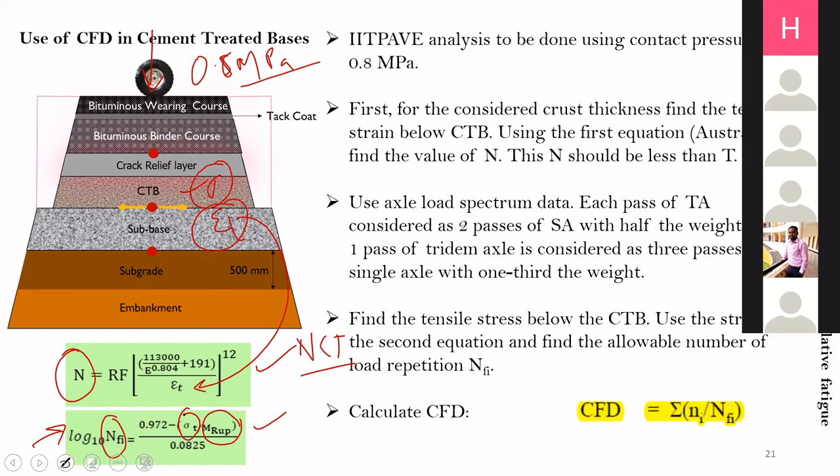Now let us see a very simple example to understand my complicated words which I have just placed before you. This example, in fact, I have taken from IRC 37 2018. Say this is the axle load spectrum data which is collected, the expected repetition is shown. So this expected repetition which you see - this is single axle, tandem axle, tridem axle. The expected repetitions are forecasted values for the design period.

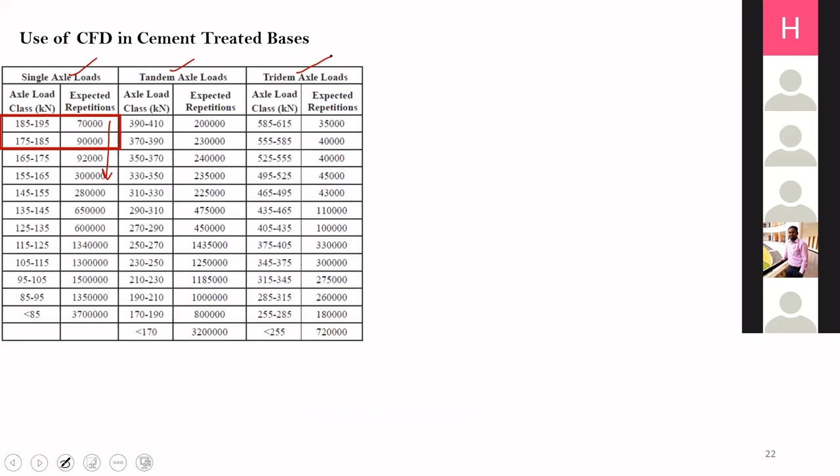Now you see the first 2 sets for single axle load. For the single axle load of 190 kilonewton, the mid value is 190 here. The expected repetition is how much? 70,000, which I can see here from traffic data. Now using 190 kilonewton single axle load in IIT PAVE, we will do a layered analysis, but we'll place here a 190 kilonewton single axle load. In IIT PAVE, we will find out the stress below the CTB layer. If you do that, you will get the value as 0.7 MPa.

Now divide this by the modulus of rupture, which here is taken as 1.4 MPa. So when you divide 0.7 by 1.4, you will get 0.5. Now you use this value in the second equation, which is the MEPDG equation, and you find out NFI. So you use this value, place it here - you know this value also.

So you take this value, put it in place here since this is the stress ratio, and find out the value of NFI. Once you do that, you will get 5.26 into 10 to the power 5.

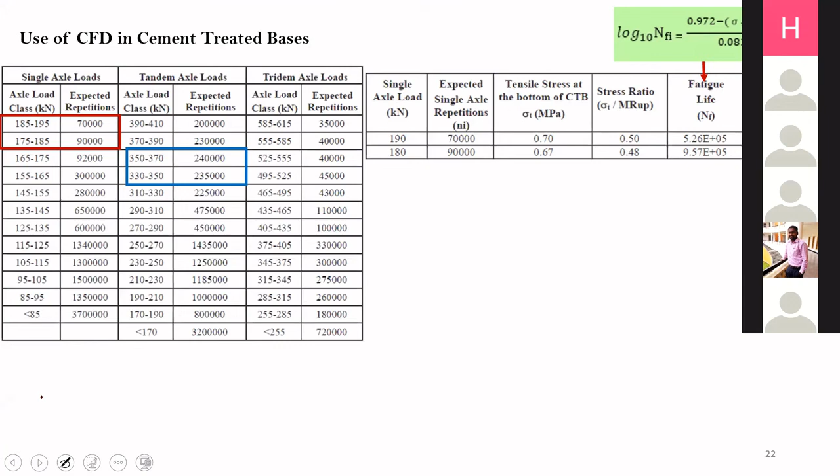If I assume that one tandem axle is equal to 2 standard axles, the number of repetitions will get doubled, so it becomes 4,80,000. Also the load will become half, since I am taking only half of the load. So instead of 360, I will take 180 while doing the layered analysis.

So using the 180 kilonewton load in IIT PAVE, I will find out the stress at the bottom of CTB, and you get 0.67. Calculate the stress ratio, calculate the fatigue life, calculate the fatigue life consumed.

Similarly, for tridem axle also, the repetition will become 3 times. So this is for 43,000 into 3, which is written here. And instead of 480 kilonewton, how much load will you put? 480 divided by 3 while doing the analysis, which is equal to 160 kilonewtons. Again you find out the stress ratio, fatigue life consumed.

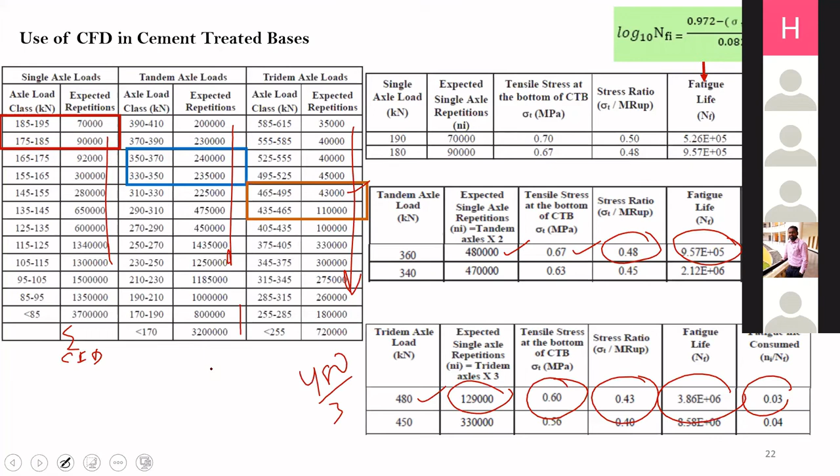And you do this for the whole column, for this column, for this column, and you calculate what is CFD here, which is the summation of all this, and so on. We do this for all columns and sum up the values of Ni divided by NFi.

Now this should be less than 1. If it is not less than 1, what do we do? We increase the thickness of the different layers.

I hope this whole part is clear, where we talked about the basic principles of pavement design. I have not discussed the detailed analysis or the linear elastic theory here, because we want to connect our first presentation with the second, which is based on design using IRC 37. So whatever fundamentals we should know within IRC 37, I thought of presenting that in the first half.

So here, finally, what do we learn? First, we learned about the definition of pavement design, and understood what is predicted traffic and allowable traffic. We also talked about the fundamentals of VDF, then the fundamentals of performance models, or you can say fundamentals of finding out the allowable traffic.

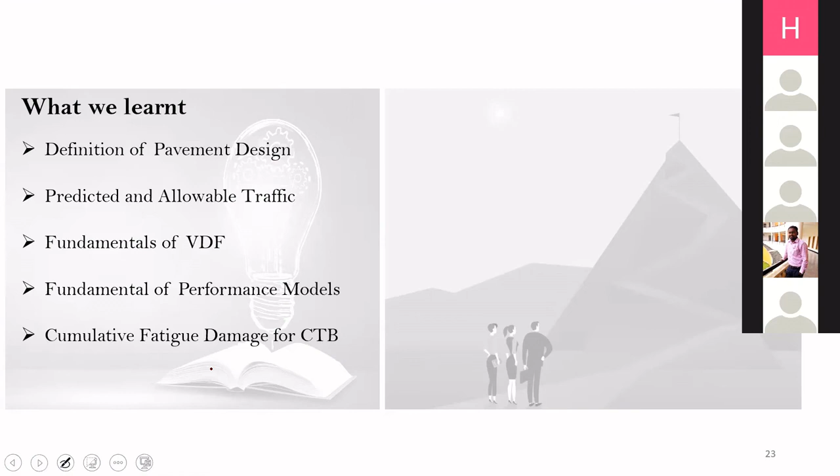And finally, because we have some unconventional bases these days, like cement treated bases, we also talked about an alternate definition of failure, like the cumulative fatigue damage principle. However, there are further challenges in pavement design which we face today.

The first challenge is that these models we talked about were developed long back, when schemes sponsored by the Ministry of Road Transport and Highways were there. Since then, our pavement construction options for different layers have changed drastically. The type of surface layer we used to use in those days, we no longer use today. So these models, developed and calibrated based on pavement sections constructed long back, may not be applicable to pavements being constructed and operated today. So there is a question about the validation of these models for the present condition.

So a very rigorous amount of data should be collected and analyzed in a similar fashion to what we did previously, so that we are able to validate the model.

Also, in the present design procedure, we do not consider incremental damage over a period of time, which means that if the modulus of any layer in the pavement is X today, after a few months or a year or two years, it will no longer be X again, because environmental factors and degradation from load would have reduced the modulus. So we are currently not designing our pavement for incremental damage over time, which is one of the very challenging tasks to achieve, specifically for our conditions in India.

Excellent lecture, sir, in a short period of time explaining everything about this pavement design philosophy. Thank you. Sir, my question is, as per your lecture, using the IRC 37 criteria we design the pavement, provide the material as per the criteria, and whatever traffic we have considered. But later on, within a short period—maybe 1 or 2 years, even though we design for 10, 15, or 20 years—the pavement is not performing as it should, with rutting or cracking, among other issues. So my question is how to identify the causes of failure, why it fails, and where we lack.

Thank you for this question. Yes, this is actually a very interesting and difficult question to answer, because pavement failure, as we have observed, does not depend on a single factor. For example, we have seen pavements with very good materials and mix design—the soil CBR was very high—but those pavements can still fail if construction is not done properly. In fact, construction is one of the most significant parameters directly affecting performance. I was looking at some case studies done in India by friends of mine, who found a location near Hyderabad, if I'm not wrong, that performed extremely well even though it didn't have good materials. It was a very interesting case study—they found the compaction of different layers was done in such a manner that it led to this good performance.